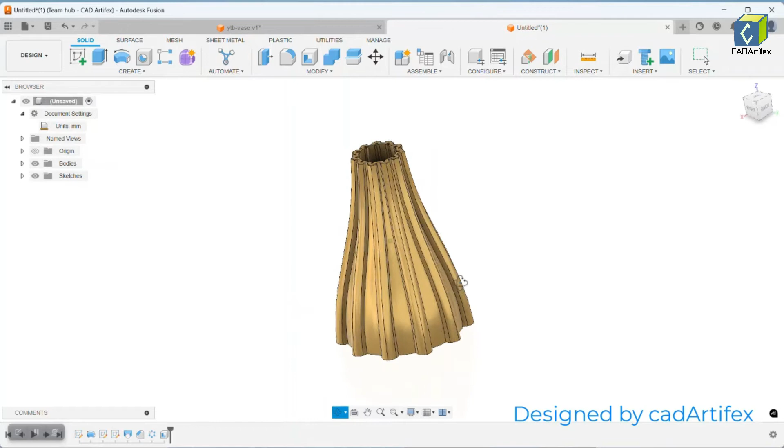Today I will show you how to design a simple but elegant vase in Fusion 360. First, make sure your units are set to millimeters.

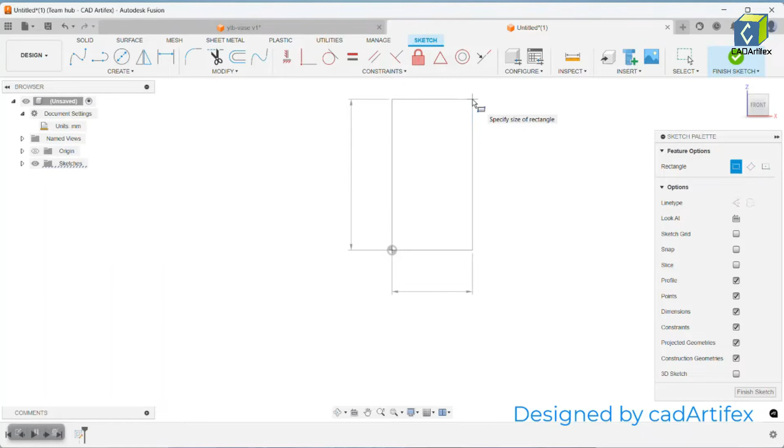After setting the units, let's start sketching. Invoke Create Sketch, select the front plane, grab the 2-point rectangle and start drawing. We'll set the dimensions: width 25, height 80 mm.

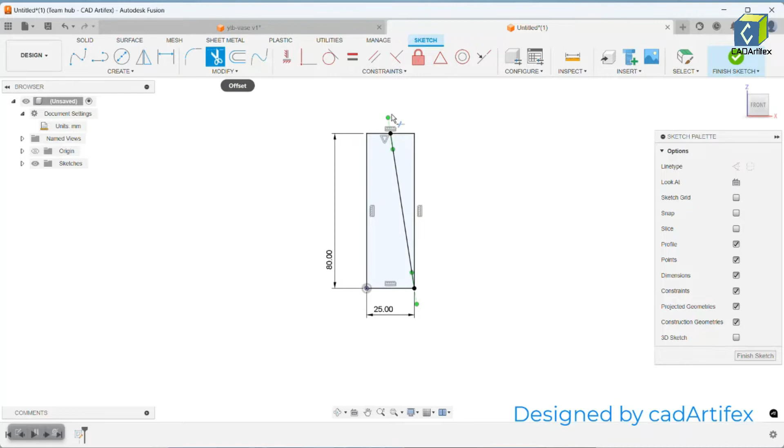Now we'll take the spline tool and draw from the top to the bottom corner. We'll trim these lines, then adjust the spline depending on the shape we need. Okay, this is the shape I need.

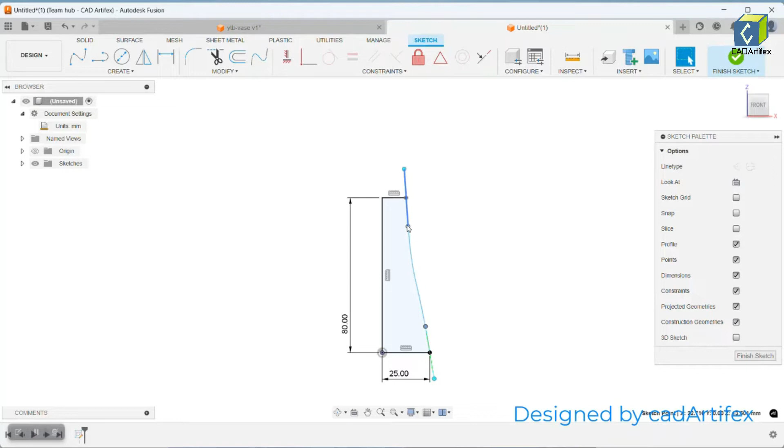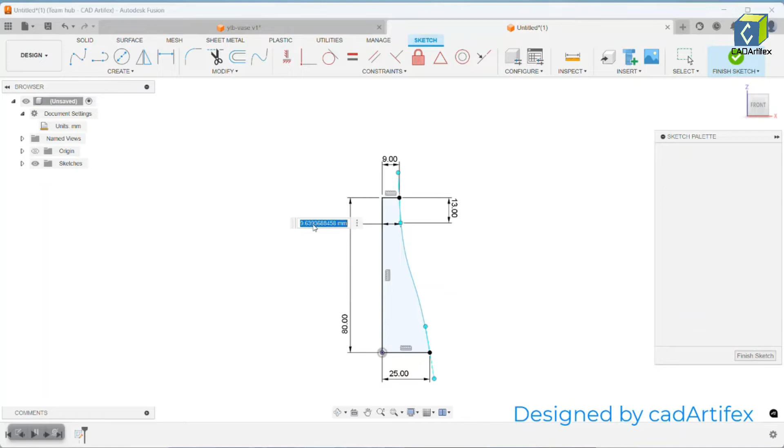Now we'll give the dimensions: here 9, and from this point to this point 13 mm, the width of the top is 10, and the bottom is 8 mm. From that width it is 25 mm. Now our sketch is fully constrained.

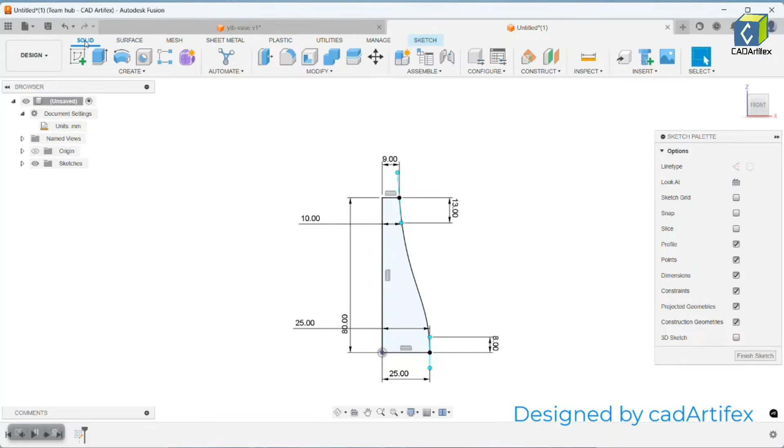Now we'll go for revolve. Invoke the revolve tool, our profile is selected by default, and we'll select the axis. Now let's revolve to 360 degrees.

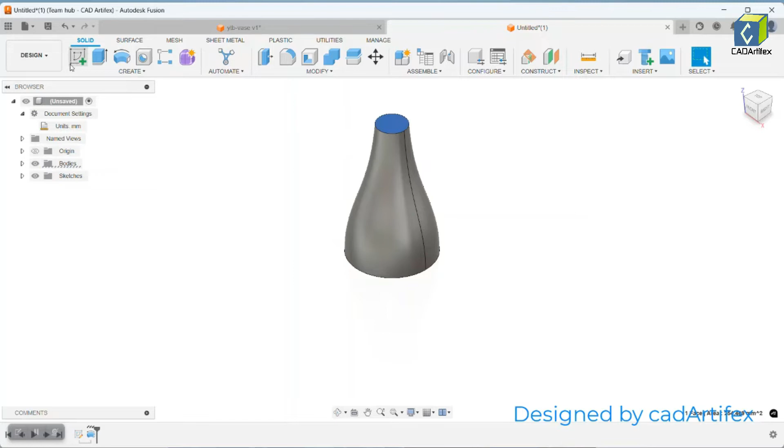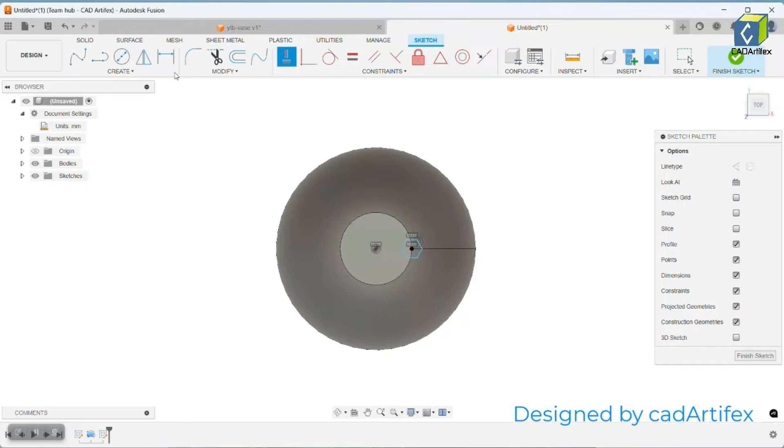After revolving, for making the rib, we'll select the top face as a sketching plane and invoke a polygon, sketching horizontally from the origin. We'll give the horizontal constraint and the dimension of width 4 mm. Now our sketch is fully constrained.

Now for the second profile, we will go to the bottom face, select the face, invoke the sketch tool, and create an ellipse.

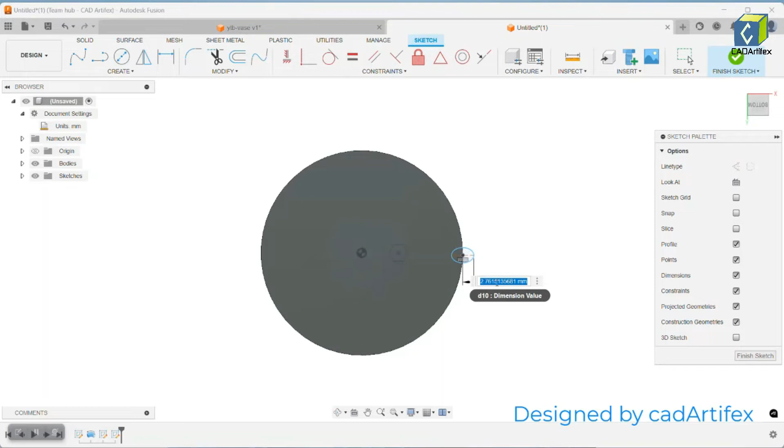We'll give the dimensions and constraints: here it is 4 mm, and the width between center to the end is 3.5 mm, and we'll give the constraint to make it aligned with the origin.

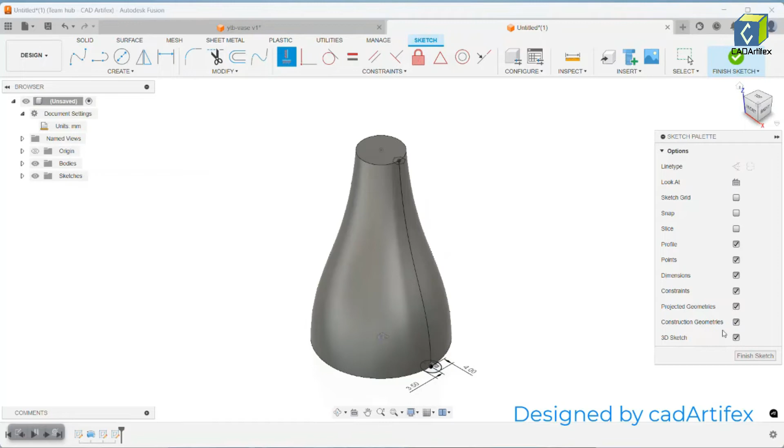Now before finishing the sketch, let's select the 3D sketch from the sketch palette dialog box. Invoke the spline tool and we'll create the path from here till the ellipse.

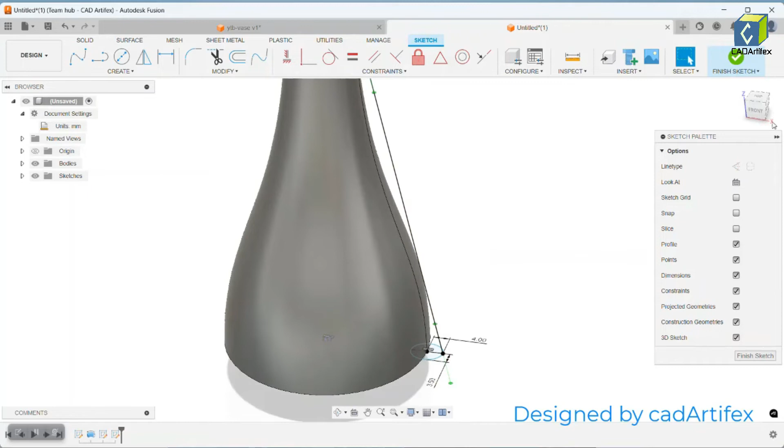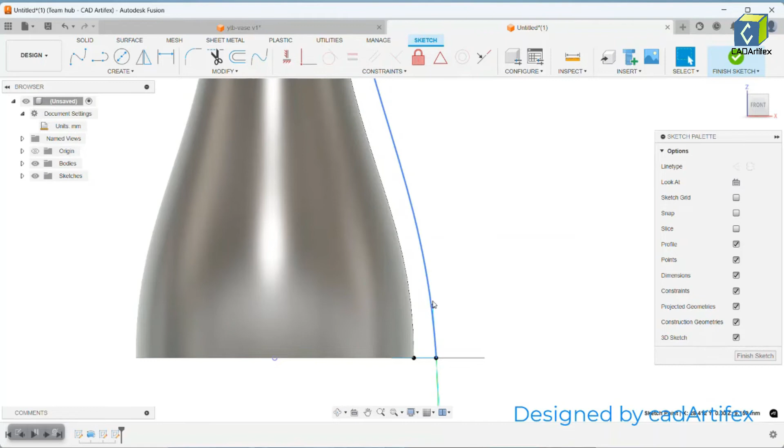We can finally adjust the shape. Here also we'll adjust. Now it's fine, and here a little more we will adjust. Now it's perfect.

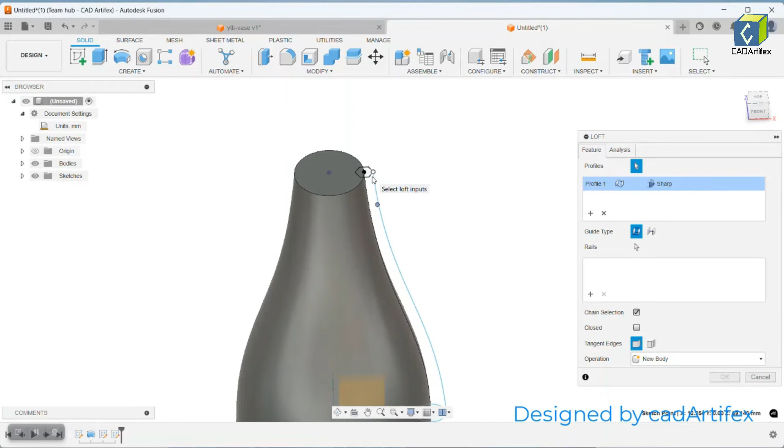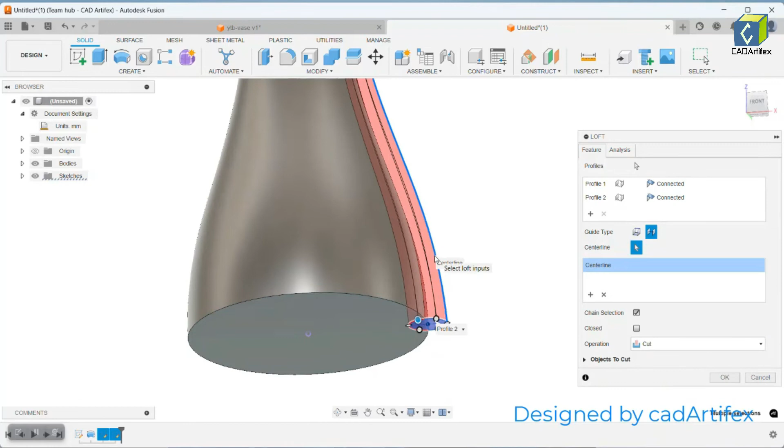Now we'll move to the next section: we will loft it. For lofting, we'll select the first profile. Already a profile had been selected before, we'll delete that. Now we'll select the second profile, the ellipse, and select the center line. The operation will change from cut to join. We have created the loft.

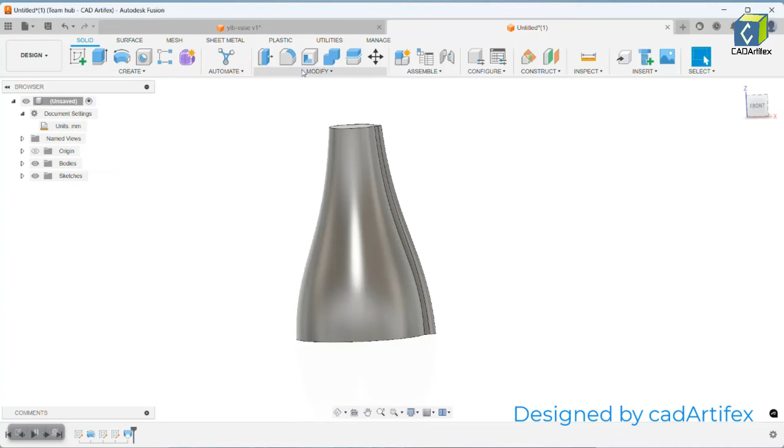Before patterning, we will give chamfer to the sharp edges so it will be easier when we pattern. Select these sharp edges and give the dimension, then click OK.

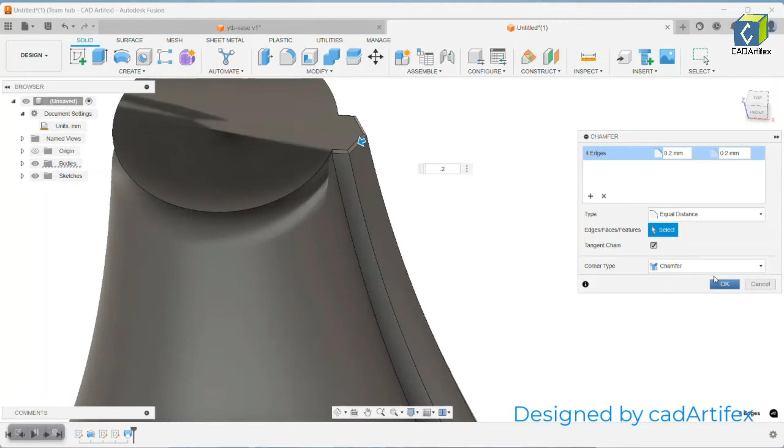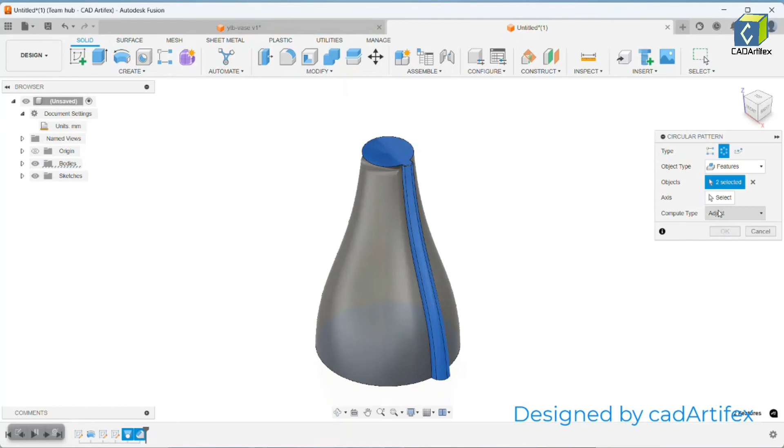For making our vase functional, we will give it a shell. Invoke the shell tool and give the shell thickness as 1 mm. Finally, we have designed the vase.

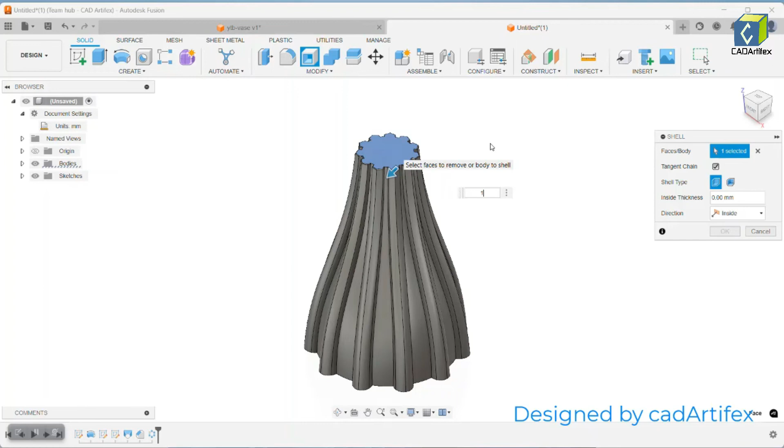Now for final touches, we will render it. Go to the render workspace, select the top face, and from appearance we will select materials and colors for your vase. Try a glossy ceramic texture or metallic finishes for a modern look. I have chosen polished brass.

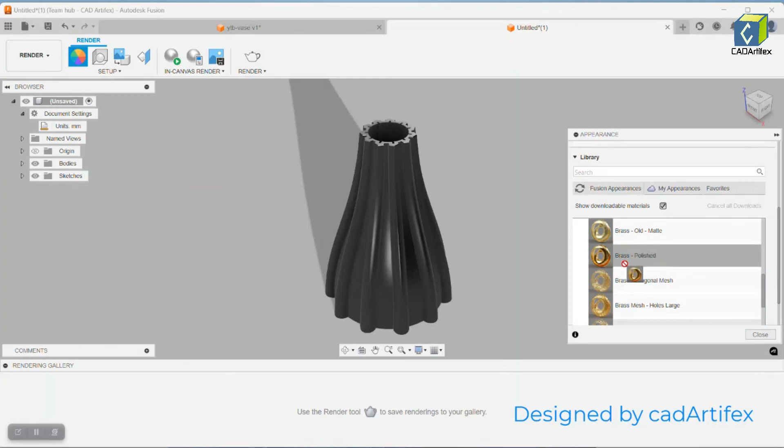Now we have just designed a vase from scratch. This is just the beginning of what you can do in Fusion 360. Feel free to experiment with shapes, patterns, and even engraving designs onto your vase. Thank you.